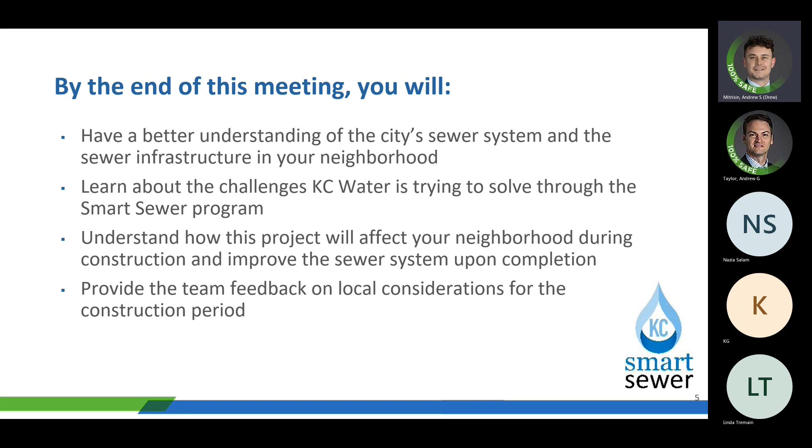Again, I'm Brian Hess. I'm the Smart Sewer Division Head with Kansas City Water. I'll just give you a little bit of background about Kansas City and our water utility. We are made up of 3 utilities within KC Water, and that handles the drinking water, our wastewater, and our stormwater. A lot of these projects that we do within KC Water address one of these utility areas, but in this case, this project's addressing our wastewater infrastructure.

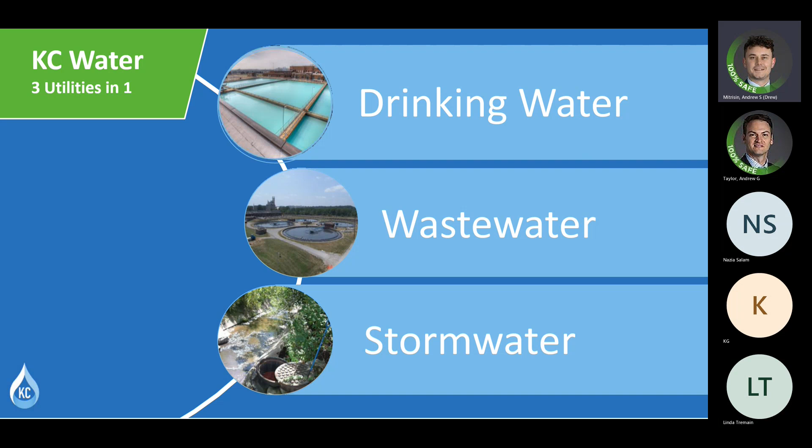So Kansas City's sewer system is made up of a combined sewer system and a separate sanitary or separate sewer system. What that means is in the older, early built part of town, they built pipes and tunnels to carry water and waste away. They just wanted to get it away. So those were combined together and mixed. And as the city built up, lots of big things built up around them, and those systems were not separate. Nowadays, we're separating those systems out, so wastewater travels in a certain set of pipes, stormwater travels in a certain set of pipes.

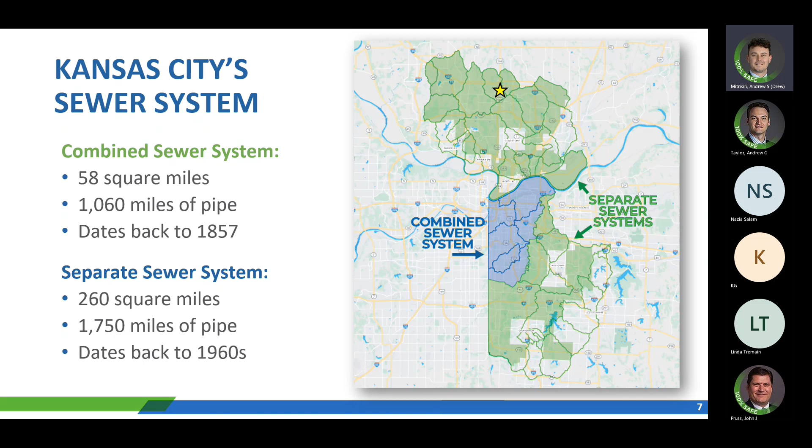The city itself has about 58 square miles of the combined sewer system. Most of that's in the older part of town and dates back to 1857. In newer sections, we started building those separate in the 1960s. So what we are dealing with on our combined sewer system is that it takes both the wastewater, the sewage that comes from the house, and also the stormwater that drains into the yards and inlets on the streets, anywhere that stormwater will go gets into these pipes.

In normal flows, the wastewater will go to the treatment plants through those pipes. But when it rains a lot, we get that overwhelming of the pipes, and what we call combined sewer overflow will occur when those mix, and it goes to the creeks and channels. So the Smart Sewer Program is in place to help remedy or minimize those types of overflow. And this is a depiction of how that works with the one pipe that has both water and wastewater in it.

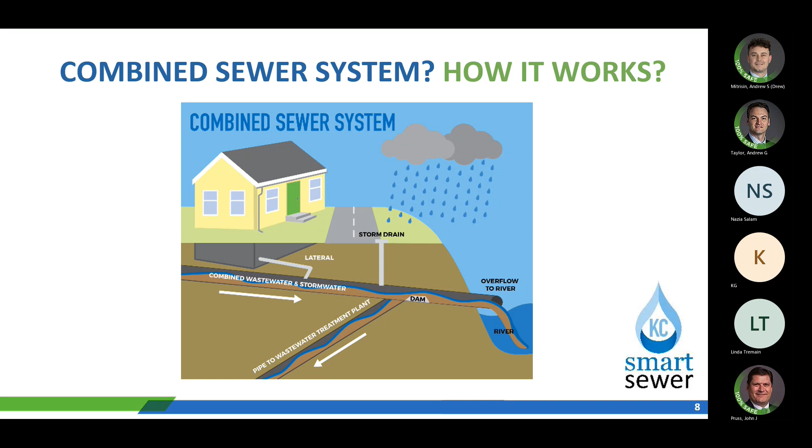Normal wastewater flow will go this way to the treatment plant, and a dam here makes sure that wastewater goes that direction. But when there's too much stormwater in the system, it'll overflow the dam, and that mix will go to a river. So that's how the combined sewer system works.

In a separate sewer system, which is what we have in general in these areas of the Northland, the stormwater is all on a separate set of pipes. So it doesn't mix with the wastewater, which is a separate system going to the treatment facility. So that's what we have up here. But in totality, the city and the Smart Sewer program are dealing with both the combined system and a separate sanitary system.

One of the things I'll mention about the combined system: that rainwater mix of wastewater goes to our treatment plants and our pump stations, so a lot of those will get overwhelmed as well when you have an excess amount of stormwater. In the separate systems, wastewater is going to the same treatment facility. So as much as we can do to help reduce the overall volume of stormwater that goes to these places, we can have that capacity to treat and pump the sewage.

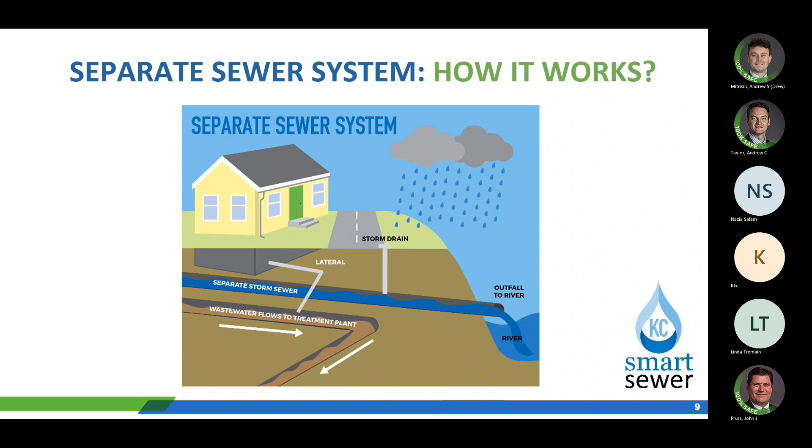So this is a depiction of the

private public sewer system. We've got pipe in the ground here, and this pipe will be wastewater. And we'll see that we've got some connections to the house. What we're doing in the separate systems is trying to minimize any stormwater that gets into the sanitary sewer system and keep it within the storm sewer system.

In the older neighborhoods, and even in some of the newer neighborhoods, the connections from storm sewer into sanitary sewer put that burden on the treatment plants, the pump stations and the pipes downstream, when that water shouldn't necessarily be there. So this project that we're going to talk about in more detail tonight is about keeping that stormwater out of our sanitary sewer system.

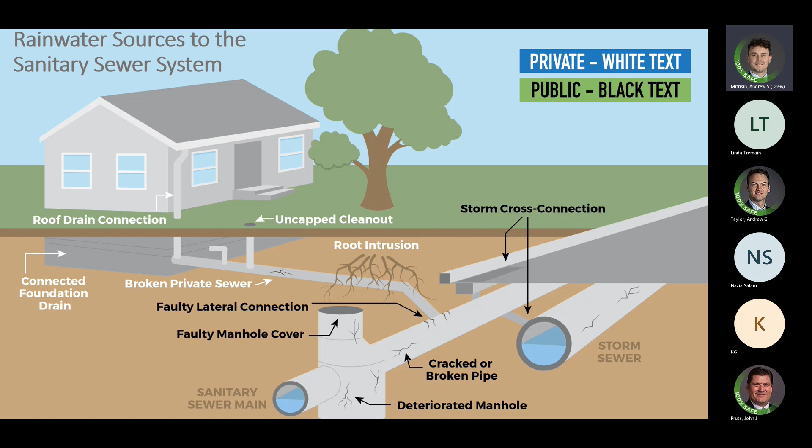So some of the challenges that we're facing at KC Water are sewer overflows during wet weather. I was talking about the combined sewers, but even in the separate sewers, if the pipes get overwhelmed, it can back up, it can overflow, and we'll end up having a wet weather overflow in lots of cases, something similar to this. We have a lot of aging infrastructure. This pipe here is brick. A lot of good craftsmanship back in the early 1900s, but that does deteriorate. We have to maintain it.

Sewer backups I talked about, and water quality in the lakes, streams and rivers is what we're trying to address too, by keeping that wastewater out of our storm systems to try and keep those lakes and rivers clean. And of course, sewer rates. In the past, the sewer rates had not kept up with our needs as far as being able to renew and fix the infrastructure to keep it up to standards.

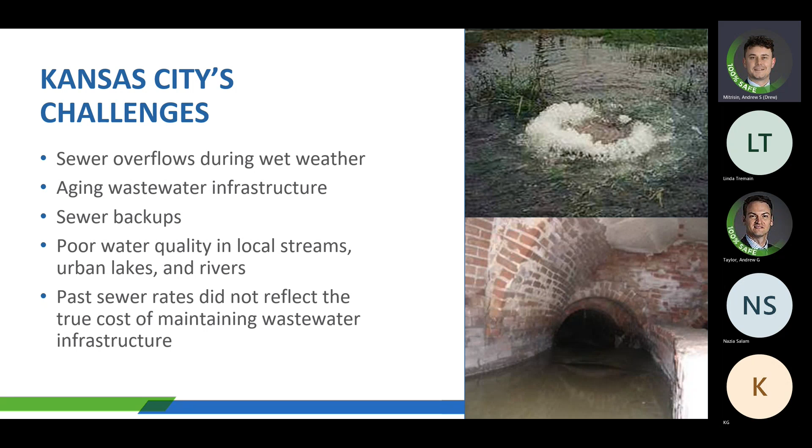The Smart Sewer program is a program that we have in KC Water that we are using to basically correct and help prevent our combined sewer overflows in our system. We have a consent decree that the EPA has handed down to Kansas City, and we're required to put certain investments within our system to address this stormwater-into-wastewater mixing situation, and it allows us to help improve public health and the quality of the streams, lakes and creeks around Kansas City.

We do a number of different types of projects to help advance that. We do green infrastructure projects that help us capture stormwater and keep it out of the pipe system for a certain amount of time, so that the flush or mixing in the wastewater pipes gets through. We do sewer separation, where we separate the storm sewers and the wastewater pipes to keep that mixing out. Sewer capacity improvement: we upsize our sewer systems and build relief sewers to make sure the pipe sizes are enough to carry that flow.

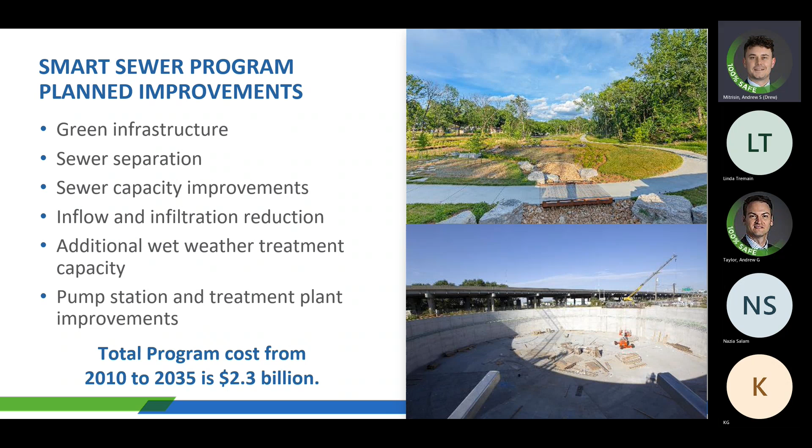This project is another one to advance that goal of getting stormwater out of our separate sanitary sewer system. But you can see that there's still a long ways to go and lots of projects left to do. And our ultimate goal at KC Water is to try and meet our consent decree, but have a healthy environment for our Kansas City residents and all residents.

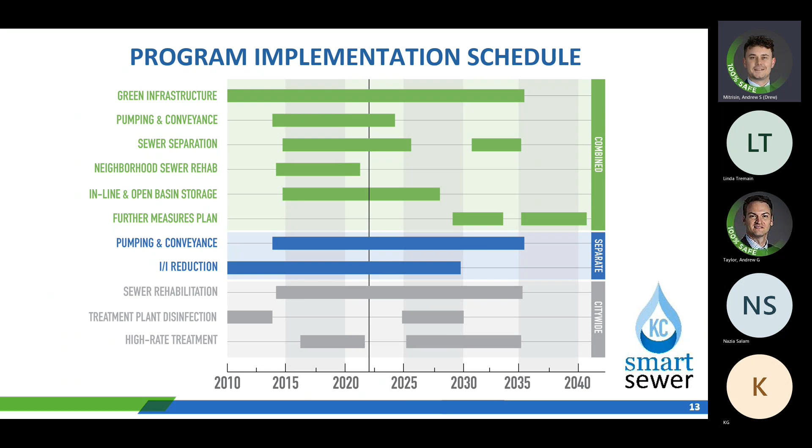Thank you, Brian. Again, my name is Jim Cherney. I work with SE3. I am working with the city as the project manager on this project. I know Drew had mentioned earlier that Deb and Ed are both here. Deb is with EAE and Ed is with Dubois. They're the design professionals who did the design on this project.

Unfortunately, this is a rather large project, so the slides aren't really going to be able to tell us a whole lot, and I highly encourage everybody who has questions to please look at the poster board or look at the plans. I have a feeling that most of the questions are going to be: okay, I live at this house, what work is going to be done in my neighborhood? So we should be able to answer all of those questions. That will probably have to be after this presentation.

So just in getting started, you can see where this is bounded, Northeast 132nd Street to 102nd Street, north and south, and Woodland Avenue to Holly Street to the east and west. So it's a very large area.

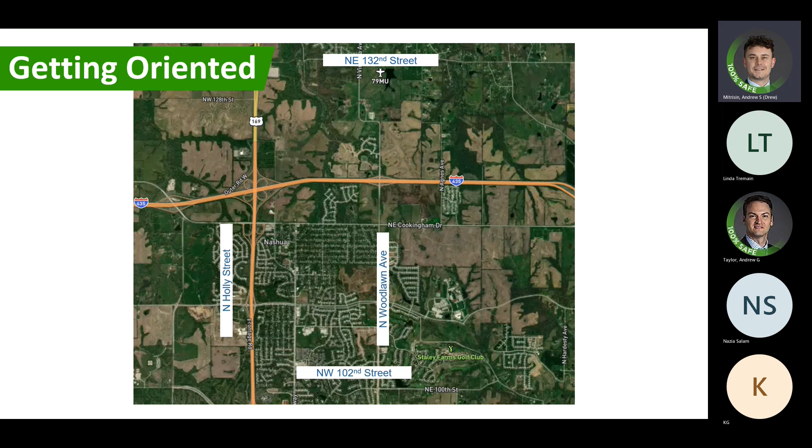This is two design projects that will essentially be one construction project. So really that means nothing to anybody here other than the two design professionals. One did the east, one did the west. Havens is the contractor. They're considering this all as just one big project.

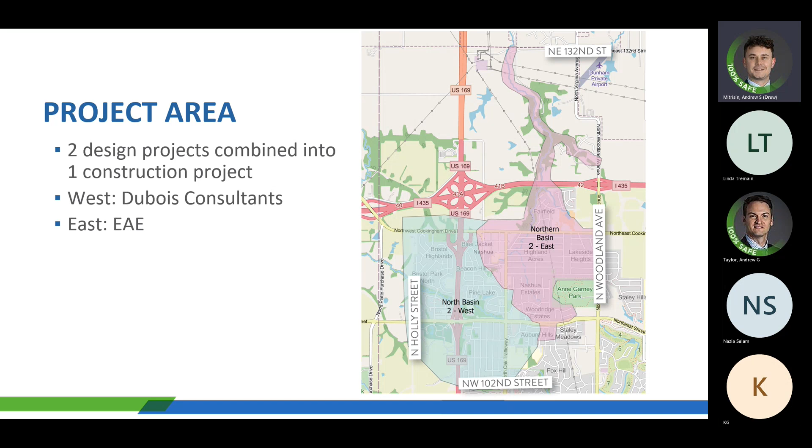As I said a few minutes ago, this is a rather large project. We have 29,000 linear feet of sewer main. To put that in perspective, that's approximately 5 miles of sewer main that would be worked on. We have 150 service lateral connections that will be worked on as well, and 450 manholes.

The type of work that will be done on these can vary. Some of the work is the CIPP lining, where we'll have a liner go through the pipe to make the fixes. Some of the pipes are more damaged than that and will have to be dug up and physically repaired. And the same goes with manholes.

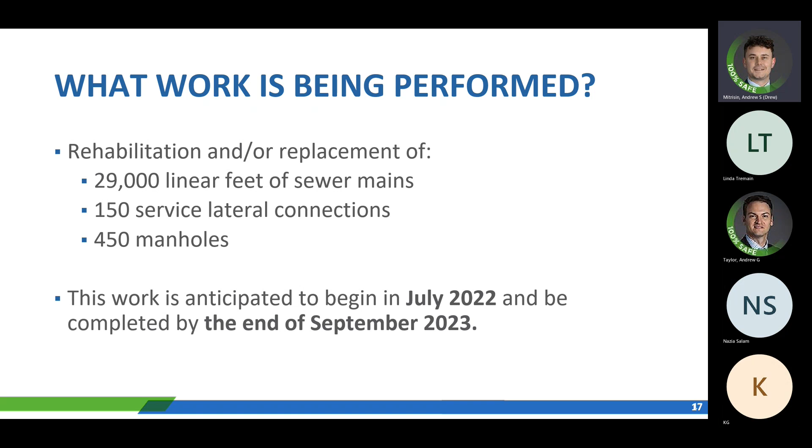Some of them can just be simply lined, which keeps the water from running into them from the outside. Some of them are old enough, damaged enough, where they just need to be lifted out and a new one put in. In some cases, we may even have to do a little bit of relocation on some of those. Again, the plans will get into very specific information, more information than you guys probably want to know, but we've got it.

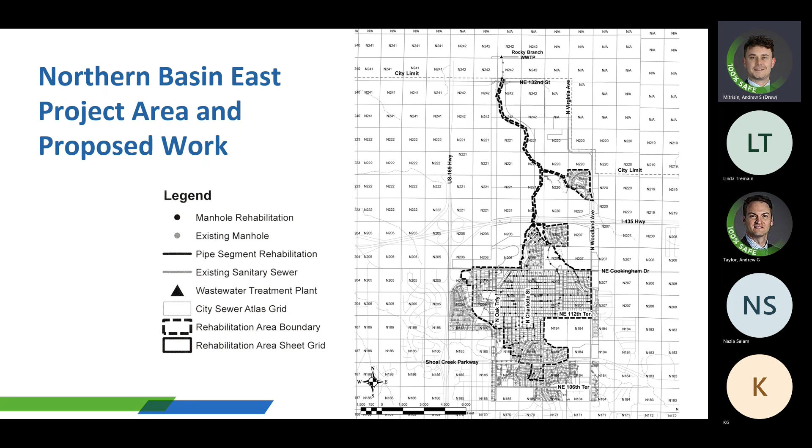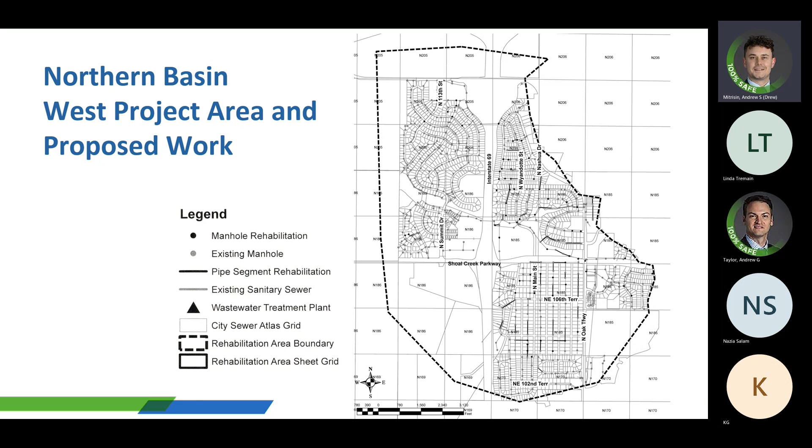This is the area to the east, and I apologize. Again, the slide is very hard to read, but it's a very large area. We're just trying to give you an idea of the bounds of the project. And this one is the west. Again, very large area, not quite as large as the east, but it still takes up a very big section, and of which this church was part of. And so again, the poster board will show a little better clarity on these slides.

So what can you expect during construction? Well, first of all, there's going to be large equipment, noise, dusty conditions. There may be some temporary street and sidewalk closures. Typically, we can keep the streets open, but it might be that a lane has to be closed. That's not a guarantee. There are some cases where the entire street will have to be closed, where we have to dig a hole to actually replace sewer pipe.

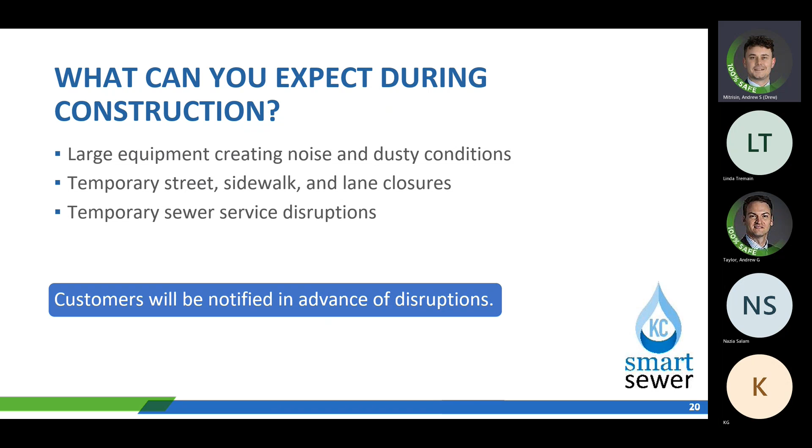And then there will be some temporary service disruption. Any kind of disruption that will happen, the residents and the owners are supposed to be notified at least 72 hours in advance. So again, you guys will all be notified if and when your house is actually impacted. We do have a web page that you can certainly feel free to peruse. And once again, we're showing the contact details that Drew had. So with that, if anybody has any questions.

Yes. So, that one, and, hey, Jim, can you repeat the question out loud? Oh, she had asked about the temporary service disruption, would that include toilets. The answer to that, yes, it will. How long will that last? It shouldn't be very long. Typically, they can go in and do their work and get out and everything can be back up. But again, that just depends on the type of work that's being done.

Likely if there's gonna be sewer disruptions like that, and correct me if I'm wrong, Gene, that would be... Let me jump in here, because basically, if we do any work like that, you'll be notified. But it'll be on a very short basis that you won't be able to use facilities or anything. Sometimes if there's an extenuating circumstance where we need to do something, we might ask you not to run the washer or something for a little bit. But it'll be very, very minimal. Okay, it's not like we're gonna have to go somewhere. No, not at all. Thank you.

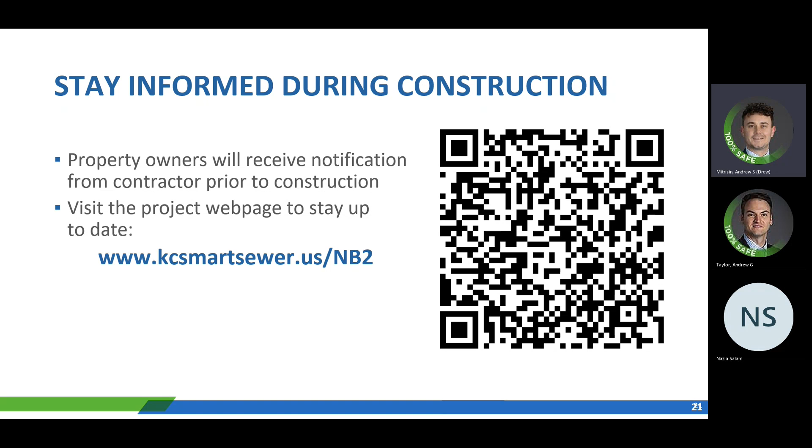And just so you're aware, John Bruce is with Burns and McDonnell. He works with the city as a program manager for the Smart Sewer program. Thank you, John. Any other questions? If you have any specific questions for your property or project area, we've got plans. The west side's over here at that table, and the east side's over here. So depending on where you live, that might be a good way to start.